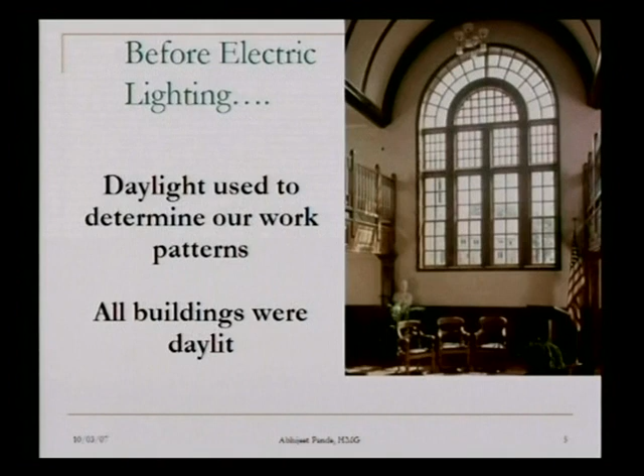So unfortunately, I'm not old enough to remember these in the US, but where I come from, India, that's still the case, thankfully so. But here, before we had a lot of electric lighting, or before it became sort of standard practice, we used to have daylighting everywhere, and that used to be our daily pattern. We sort of adjusted our activities around the daylight.

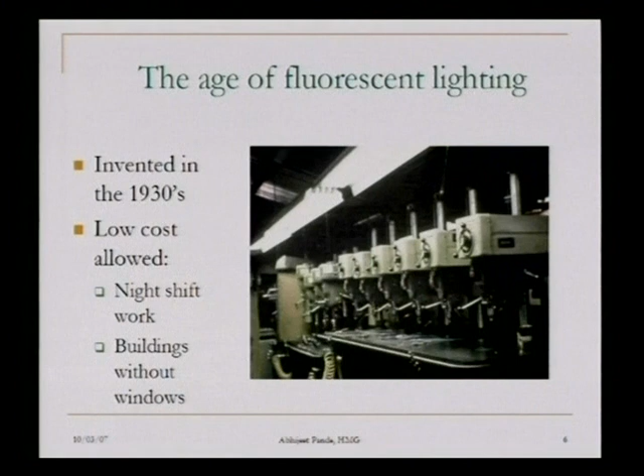Then, of course, we got the machines, and then we got all the wonderful things like air conditioning and low-cost construction techniques, and we got ourselves boxes. And when you have those boxes, you can go deeper. You can do without windows, those pesky things that leak and bring in sunlight and all that. And who wants those distractions anyways?

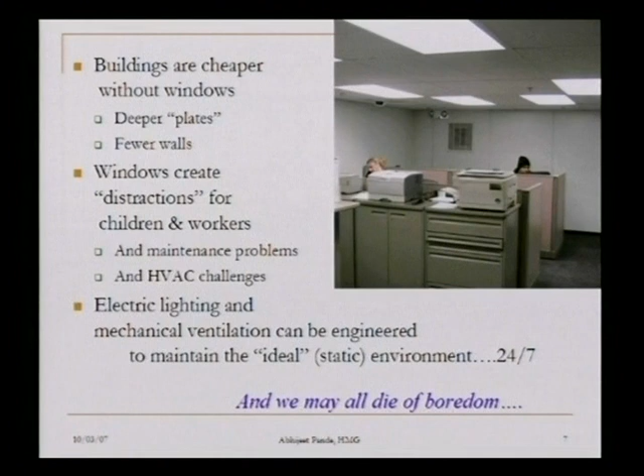A lot of schools actually went away from doing windows, not because they didn't like the sunlight, but because they thought, hey, if the student's going to look outside, he's going to get distracted, so let's erect walls around them. And we apparently do that with our workers too. So, thankfully we got the Dilbert cartoons out of that. And I'm not going to say anything about that, but that's the reality.

Of course, there's going to be some which are going to be above this range, but the point is, give people the control on their daylighting in their building or the light levels in their building, chances are that they're going to choose something lesser than what this 80% rule says.

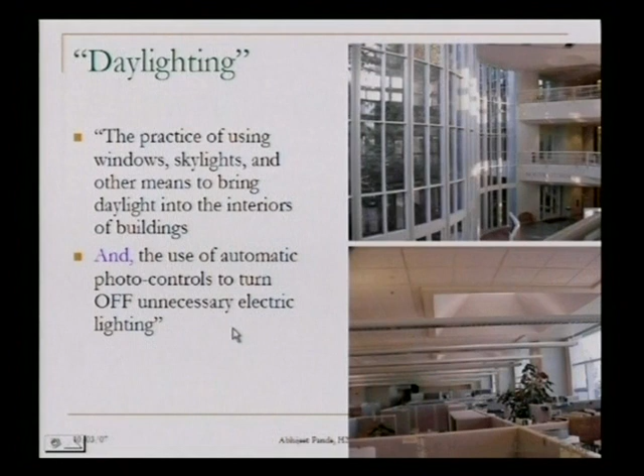So just a brief idea of what the energy savings potential is, and I'm sorry, these are California-specific numbers. The numbers here might vary, but the point is that there are significant savings possible through doing daylighting and by turning off the electric lighting. And we found, for example, that for a retail chain in California, the primary motivation was to save energy.

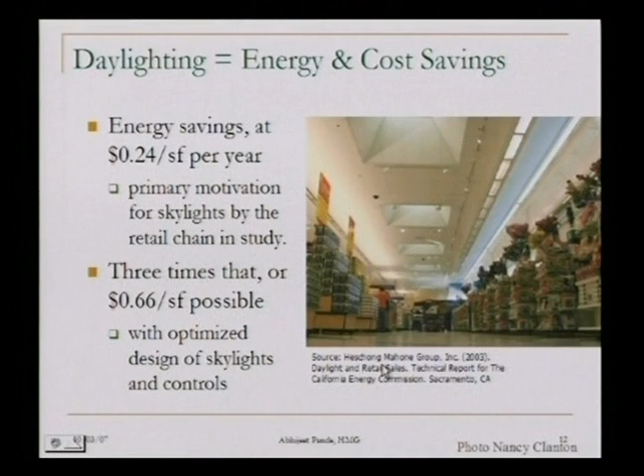It wasn't any sort of inherent green interest or trying to be sort of one-upmanship that seems to go on more often now. But the point also was that they could have gotten at least 3 times as much savings if they had done it right. So intentions are good. They want to do the right thing. You could do more. Here's another set of numbers. If you're looking at the lighting energy itself in buildings with proper daylighting and controls, you could save anywhere from 30 to 80% of your electric lighting.

As an example, I work in a building. I never use my electric lights at all. I have pretty good daylight. The only time I use it is when I work after 7, which, thanks to being married, I don't do that quite often anymore. But whenever I do, that's the only time I use the electric lights.

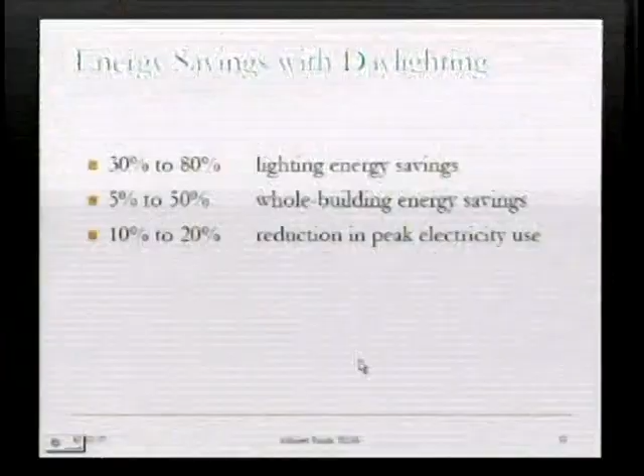How much does that convert to whole building energy savings? Depending on what weather you are in, 5 to 50%. And then this is kind of becoming a bigger issue now, is peak electricity use. One of our local utilities in Sacramento has to essentially double its capacity to provide electricity for that 50 hours of the summer when it's 110 degrees or 100 degrees outside and everybody is using their air conditioning.

Point is that daylighting can be an excellent strategy to get to those peak savings. If you can just turn off the lights or dim them 20%, you get your 10 to 20% energy savings. And the other point is that it works forever. You get it to work right once, it's going to work, and if it is ever broken, as if the power goes out or something goes wrong, you have made sure that your building has enough light for people to survive and work if need be.

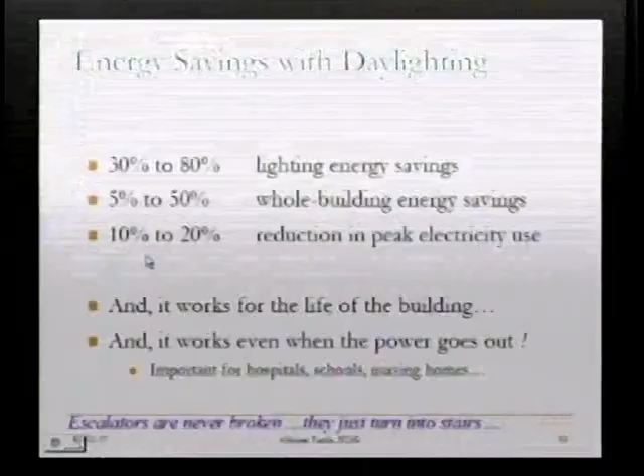I recently did a case study on a fire station and a police station, critical facility, where they used this principle to design their building, not because, again, they wanted to maximize their LEED points, but because their whole situation was if California ever has the next blackout, they want to make sure that they at least can work and get all their functions done with their backup generators supplying their basic functions, but they don't waste that on lighting and other things.

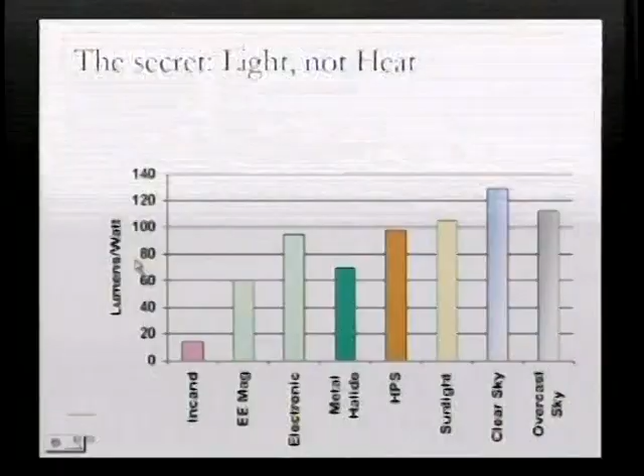So what's the secret? Some of these numbers might be changing now, but here's sort of an idea of the efficacy of different light sources that we work on, and these are expressed in terms of lumens per watt. So how much quantity of light would you get if you supply 1 watt of electricity to that particular device? Our good old light bulb is down there, right around 15. Some of our most efficient technologies are trying to get around 100 lumens per watt. But with daylight, you'll see that the potential is much higher. Especially with a clear sky, and if you avoid the direct glare from sunlight, you can have pretty incredible lumens per watt.

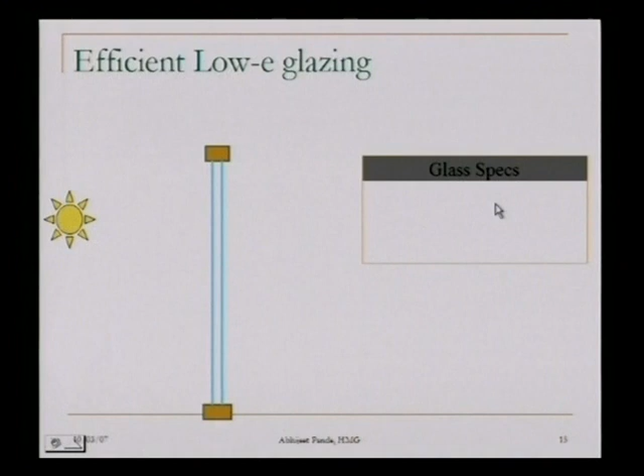How do you do that? This is one of the strategies, low-E glazing. You have 100 watts per square foot of heat coming in. You have a low solar heat gain coefficient. You get 40% of that inside. The same window can actually let in 70% of the illumination. So when you're talking about the luminous efficacy of this, you're talking about 175 lumens per watt. That's almost twice of any current electric lighting technologies.

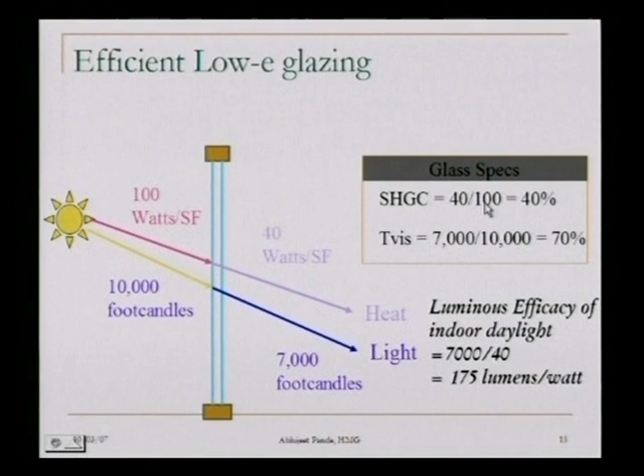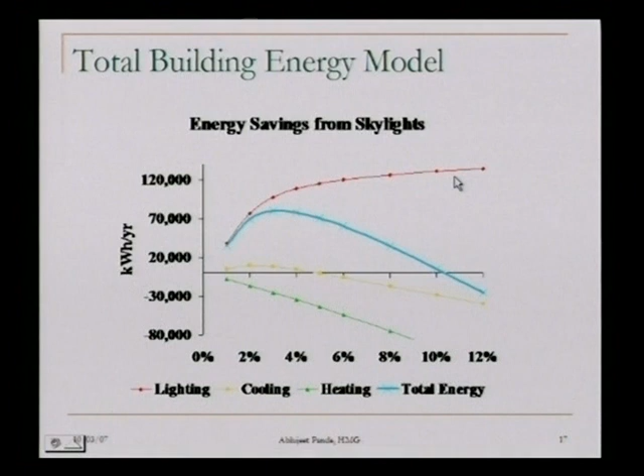Here's another way to look at it. Again, the same sort of skylight ratio. Now we're looking at the energy savings from skylights. As you increase the amount of skylights in the space, you're increasing the lighting savings, but again, they sort of taper off after a certain limit. You get some cooling energy savings because you're reducing the amount of heat the lighting system is putting into the space. You are increasing the heating. Here's what happened with the total energy use. So beyond a certain limit, your total energy use is going to start increasing, your savings start decreasing.

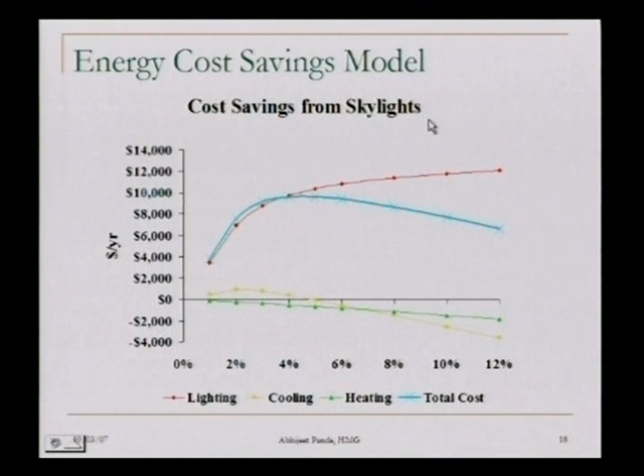Same thing in terms of the energy cost. So the point is, daylight is a great thing, and we all should do it, but too much of a good thing is a bad thing. And we're going to come back to that in the later parts of the presentation. But the point is, we need to be intelligent about how much we use that daylight.

And here's the problem. Can we get those promised savings? We have all our energy savings models and simulations that are going to tell us we can save 50% of our building energy, but can we get there if we don't do the design right, or if we don't get those photo controls to work? So that's the challenge. If people start taping over sensors or turning their blinds down and turning the lights on full output, what's the use of these daylighting apertures?

So I'm going to cover two studies, as I said. The first one we did in 2003 looked at top-lit buildings. These are buildings with skylights. The second study we did for side lighting. These are buildings with windows, in 2005.

In each of these, we compared the on-site energy savings against a sort of calibrated annual energy simulation model. And what we came up with is a realized savings ratio. I'm going to go into that later. But the point with that is we wanted to compare how much energy is being saved on site versus how much our latest and greatest models are saying we could save.

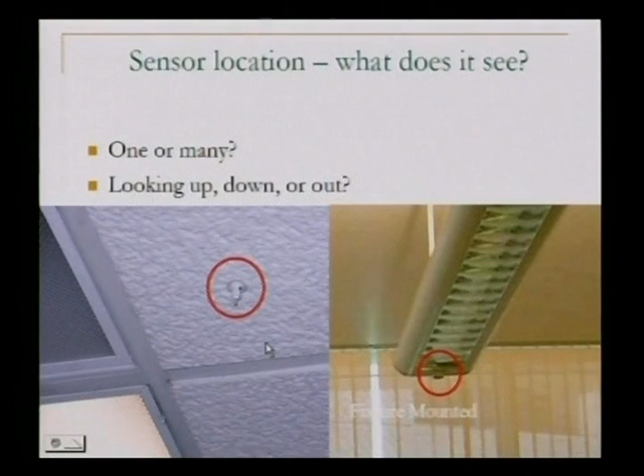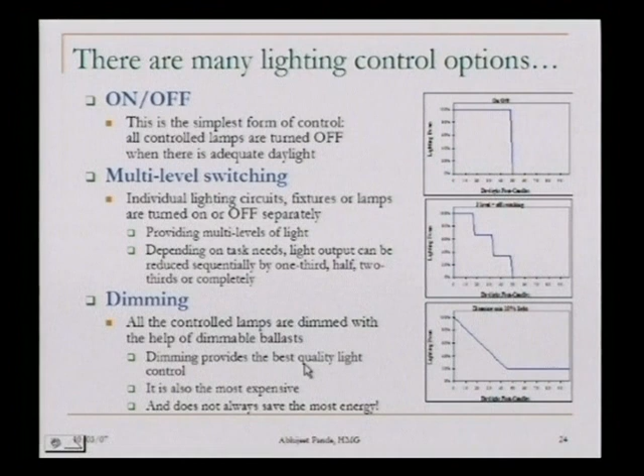You can have the sensor looking down in the space. You can mount it on the fixture. You can mount it outside. You can have a simple on-off control. You can have a multi-level switching control, so you get a little bit more fine-grained detail in your lighting control. Or you can do dimming, which is kind of the Cadillac of the daylighting control solutions. Your electric lighting levels will vary inversely proportional to the outdoor daylight.

The point I'm going to sort of belabor, and I'm going to come back to this, is whether you're doing switching or dimming, there's a thing called a dead band, not that the control system drops dead, but the idea is that for each of these, you need a set point when the lights are going to turn on. So if the daylight is, say, below 20 foot-candles out here, the lights come on. And then you need the lights to turn off when the daylight is above a certain limit, say 50 foot-candles.

The point is, if they are too close, you're going to get cycling and you're going to have lights come on and off or dim up and down. It's a nuisance to the occupants, and it's also going to eventually burn out your lighting system much faster. So the point is, we need to have that dead band, and we need to have a time delay so that it's not just cycling with the outdoor lighting.

Obviously, there's various types of photo control equipment, and I'm not going to go in a lot of detail, but you can control things at the individual fixture level. You can control it at the circuit level. You can control it at a whole facility level. And as you go more towards the fixture, the system gets more and more complicated because you have so many more components that you're trying to control independent of each other.

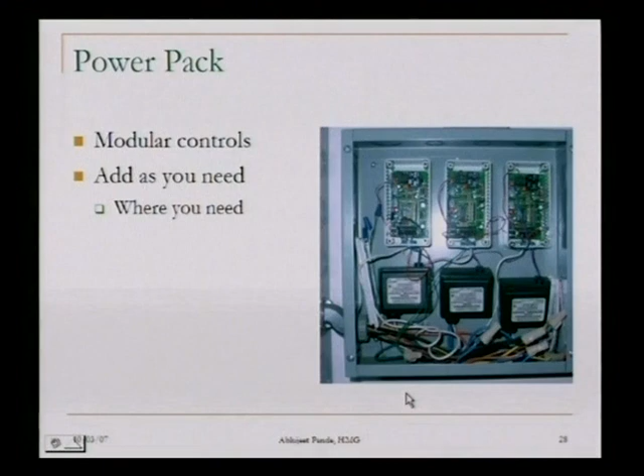You can do lighting controls alone, or you can do them as part of the EMS. Here's an example of an EMS system, or you could just go circuit by circuit or with a simple power pack. So what's the best control type, or what's going to give you the most savings? Well, the classic consulting answer is it depends.

What's your occupancy type? What are you going to control these lights with? How do you want to control them? What's the quality of light you need in the space? Is this museum quality lighting? Is this lighting that you require in a storage room? What's your energy savings target? Let's say you're very aggressive and you want to get that 50% savings target.

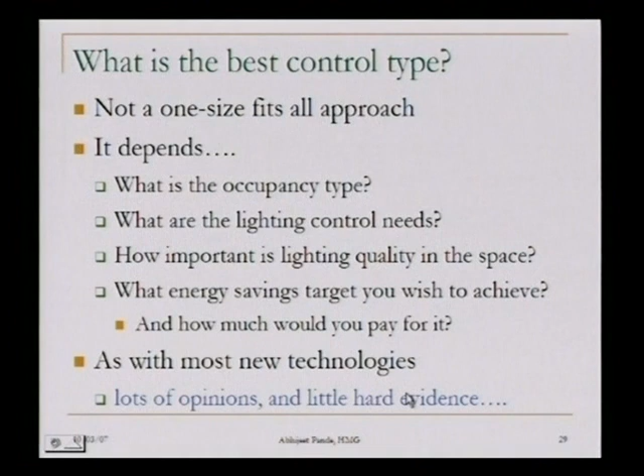So there's lots of opinions and little evidence, and I'm going to present what evidence we have. Let's start with the top lighting. There's lots of myths about skylighting and skylighting controls in general. They are hard to understand.

They are very hard to install. They fail very often. They're going to annoy the occupants, and they're going to never use them again. The skylights are going to cause too much heat gain, and yes, they're going to leak. So that's sort of all the issues we're going to look at.

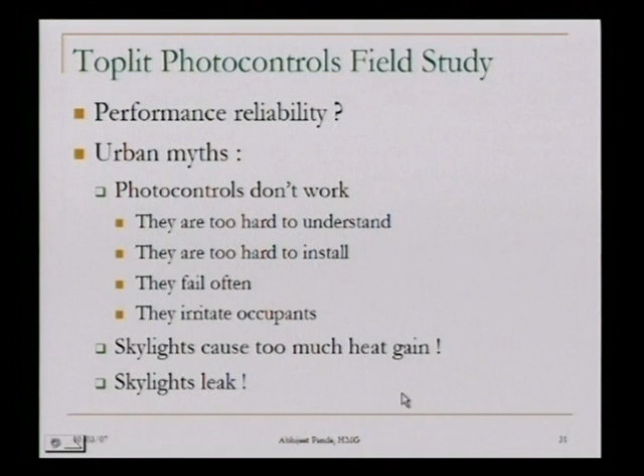So what we did, this is back in 2003, and this is California specific, but we looked at about 150 buildings that had skylighting and had daylighting controls, and we gave them a call, talked with them about what their systems were, see if the photo control systems were still installed on site, and completed interviews with

them and said, can we come to your sites and take a look at this and verify how much they are saving? Of those, about 46 said, yeah, you can come ahead and do your survey. So we went there, we did some power metering, did the analysis, and we're going to look at that next.

So to look at what types of spaces we did, now remember this is top lighting skylights, so you'll see a lot of buildings which are sort of the large big box buildings. There's manufacturing warehouses, there's retail buildings, a few offices, and a few classrooms.

A lot of these, because again they happen to be part of that big box retail chain or manufacturing, the lighting is part of the whole building EMS control system. It's not a standalone, although we do have a lot of buildings that are controlled individually.

This last bullet here is kind of interesting, right? We called 160 people. We confirmed with them that they had photo controls. Yeah, we have skylights, we have controls. Come on site, you can verify savings. 3 sites, there weren't any photo controls.

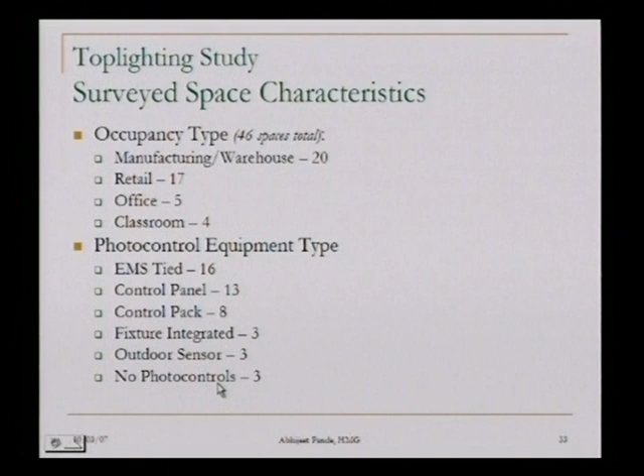One of them had occupancy controls. The other site, they had light switches. So the point is, a lot of people don't know about this. They think they do; sometimes they don't. Here's what people told us their systems were doing. Overall, pretty good picture, right?

With 46 sites visited, about 36 of them are working or working with very minor problems. Only 2 sites, they told us the photo controls were not working. 4 of the sites, they said, yeah, they're working, but we're not really happy. We want more savings, so we're just turning off our lights.

One site where they said, no, we don't like it. We keep our lights on all the time. As I said, 3 sites, well, they didn't have any photo controls.

Wherever they had this sort of dissatisfaction or, gosh, this could work better, we asked them, what was it with? We asked them about the building type. We talked about what kind of a control system it was, whether it was fluorescent lighting that was a problem or HIDs, whether it was particular occupancies, whether it was just a bad idea to do this in offices

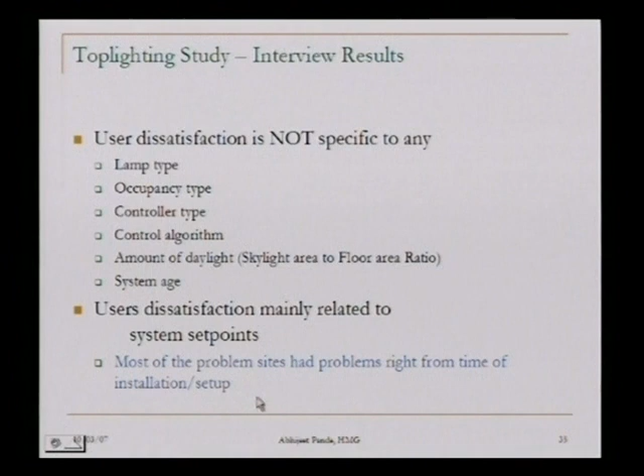or classrooms. Was it the control algorithms, whether it was switching or dimming or multi-level switching, was that an issue that they were unhappy with? Most of the answers said, no, it's not specific to any of these. Most of them dealt with sort of the details.

They either come on too soon, they go off too soon, they fluctuate too much, or they're just doing too many things or too few things. And most of these problems seem to be happening from the time the systems were installed. So it wasn't something that they were happy with and then started having problems with.

So we went on site and we did a subset of these sites. Now we went on 46 sites, as I said. We installed lighting loggers on all of these, measured the energy use, and we had to drop a few sites either because our loggers failed or they didn't have photo controls, or sometimes these loggers are pretty attractive targets for shoplifters, so some of them walked away.

But anyways, we had 32 sites that we could look at, and we categorized them independent of what the people said into fully automated versus those that were working, but people were manually assisting them.

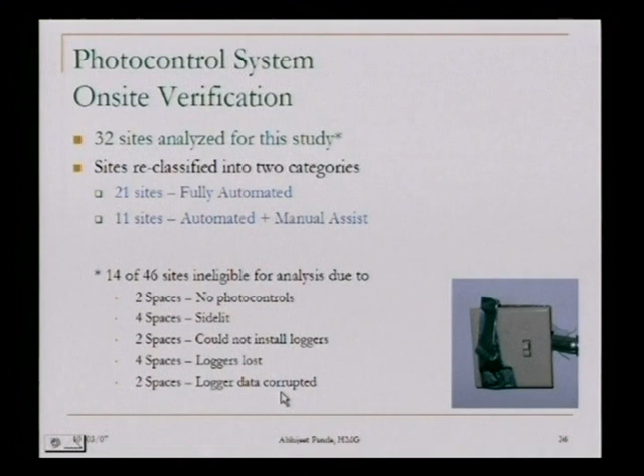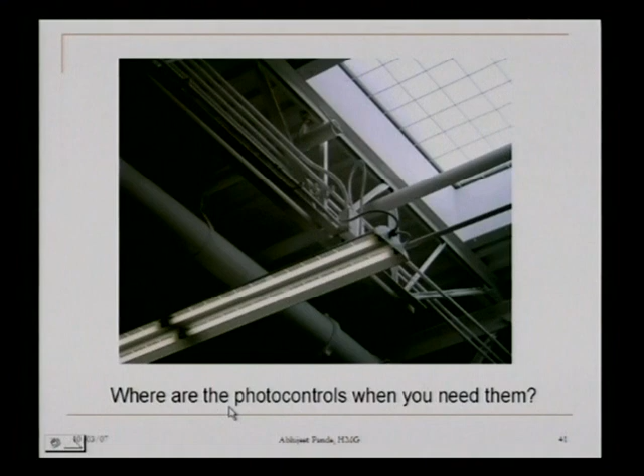And we got pretty close to the ideal realized savings. So that's the good part. But there's still some of those out there in the market. So here's the story. If you don't get the systems to work right, if they're not happy with it, it's never going to be fixed unless you go in and do some commissioning in those systems.

As you can see, most of the sites with manual assist and about a third of the sites, even with fully automated systems, they said that we were never happy with these systems. They never did what we thought they should be doing. And as I said, the problems range from either the lights are turning off too soon or too late, or doing too much or too little frequently.

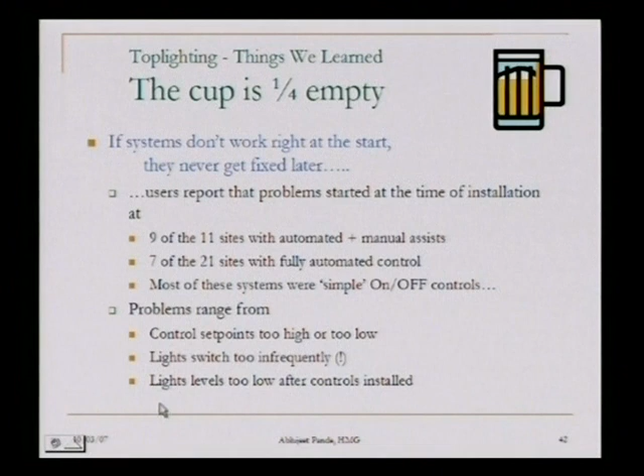Most of the people, even those where the systems are working very well and saving as much as ideal, don't know how to make these systems work, or how these systems work, or how to change them. A third, even those buildings that were working well, didn't even know where the sensors were. I had to spend some quality time crawling in attics and over roofs and various places trying to find a sensor which looks that size, right? So imagine a 50,000 square foot warehouse, 20-foot high ceiling, trying to look for this all over the place.

Point is, if the owners and the building staff don't know, there's no chance if it fails they're going to know how to fix it. And again, if they don't turn the lights off, you're going to increase the building energy use. So we came up with a photo controls guidelines document aimed at manufacturers that first time. And we said, how can you make your products better and inform these people of how they should be working? So we gave them some guidance on how to make these products, the packaging, the information provided with the products, and the instructions that they provide to their installers.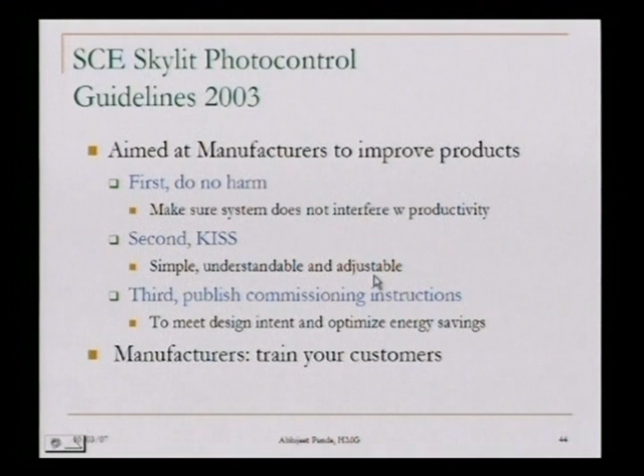And the basic principle is keep it simple, keep it understandable, and make it adjustable. If it's not adjustable, if it's not simple, or if they can't understand it, it may work now, but the next time something fails, it's not going to work for the rest of its life. So then we presented this in 2003, and the first question I used to get was, well, this is great, but what about side lighting? Because that's really the problem, because top lighting, you talk about warehouses and retail stores, but most of our buildings are like this. We have offices, and so what's going on there?

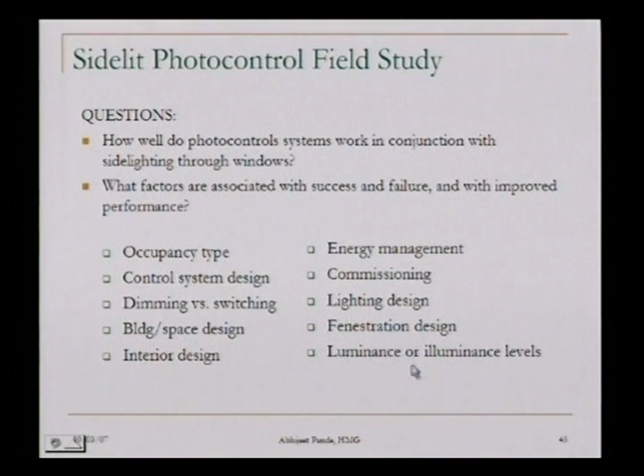Our hypothesis was that we're not going to find such stellar results for side lighting as we found for top lighting. One, it's a more difficult process to get lighting into your space through side lighting, especially if you have a deep floor plate. So we did a follow-up study, and this one we did in Oregon, Washington, and California, so it was a little bit more widespread, so we could get more climates and more building types. And we looked at which of these factors would start affecting the photo controls' performance and see if it works well or less well than with top lighting.

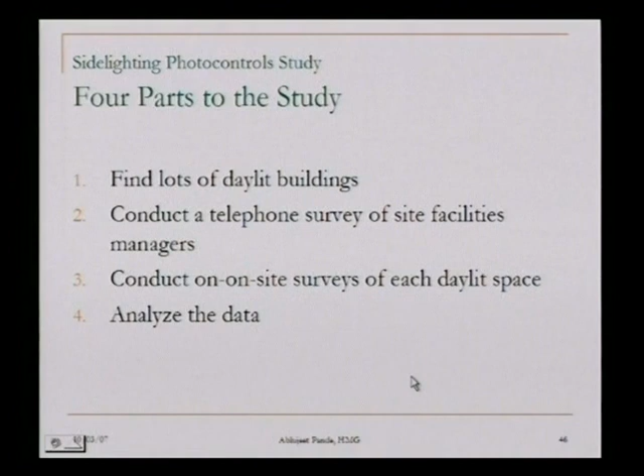So again, similar idea, find lots of daylit buildings, call them up and say, hey, do you have photo controls? In most cases, explain to them what photo controls are and what they should be doing, and saying, do you have those? Do you have a device that kind of looks like this and is hanging out from your ceiling or something? And then asking their permission and going on site, doing our survey, collecting data, and then analyzing that data to compare to what they were saying. So this time, again, we called about 163 buildings. We asked them if they had photo controls. If they had them, we asked them if they were working, and most of them were saying, oh yeah, we put them in and they work great.

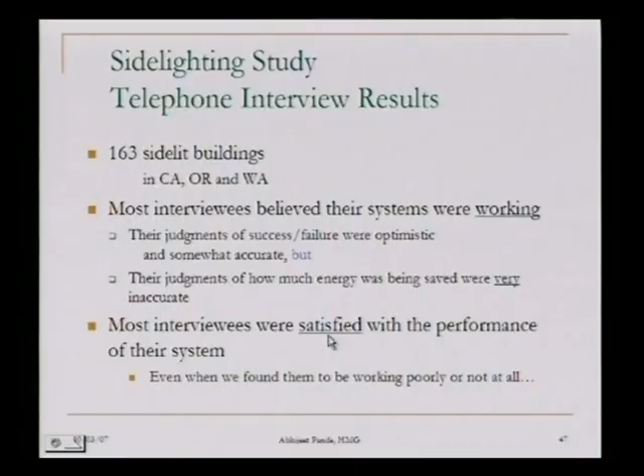Later on, we found out that they were kind of optimistic in how much their systems were working. But in general, if they said it was working, it was indeed working. Or if they said, no, it never worked, it never was working. The second point that was important, though, is although they knew if the system was working or not, their estimate of how much energy they were saving was very inaccurate. So you ask somebody on the phone, hey, you installed a photo control system, how much do you think it's saving you? Oh, 50% or 5% or 2%. And the results may or may not have anything to do with this. The point here is most of them, even those that said my system is not working, were very satisfied with the performance. Go figure, if they have disabled it, I don't know why they are satisfied, but they were satisfied.

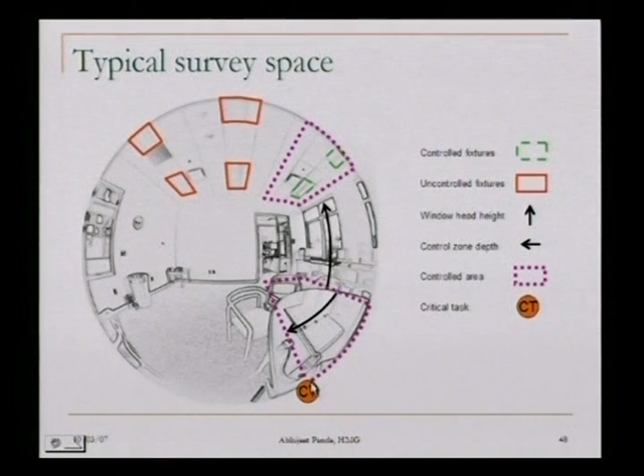So all of these, which are controlled by the daylight sensor, are in the control zone. So in this case, this first row of light fixtures was controlled by the daylighting sensor. So that's our control zone. In each case, the furthest spot in that control zone away from the window was our critical task location. Now, if that happened to be the water cooler, we tried not to do the water cooler, tried to do a workspace. So the idea is that the person who is working there is most likely going to be irritated if the lights are turned off and he or she doesn't have enough daylight from the windows.

So we installed loggers looking at daylight coming in from windows. We installed current loggers on electric lights, both the controlled fixtures as well as the uncontrolled. Uncontrolled as in those not controlled by photo controls. They might have other controls like manual switches or occupancy controls. So we could compare those two. We looked at, as I said, the critical task illuminance, and we looked at how much the photosensor was seeing, so we can see if the photosensor location was part of the issue.

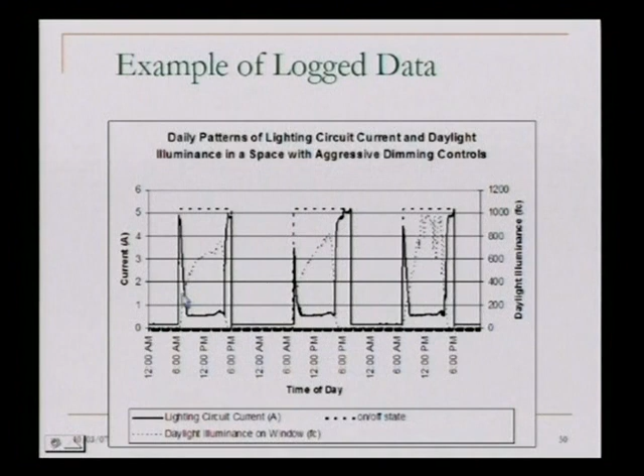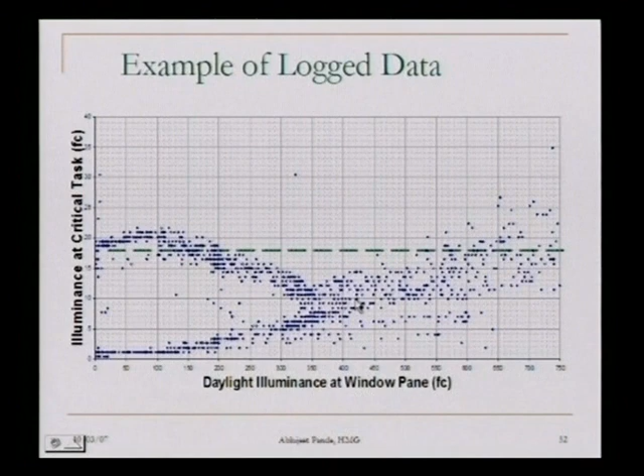If this was not working, you would see a parallel line going up here, always providing that additional 20, 25 foot candles. But since this is a good dimming system, it's trying to maintain that illuminance level, and actually this is an overly aggressive system. As you can see, it's trying to maintain this level of illumination and actually doing a little bit more. People are just happy with that. They are trying to be more aggressive. So the point is, they're saving really well.

So we went on site, as I said, we asked these people about these systems and said, what do you mean by working well? Oh yeah, they put those systems in and it works. So we asked them specifically, did you ever commission these things? Did somebody do a full commissioning of these? And it was kind of a fuzzy concept. Most of the people, if they ever had records, they couldn't show us. In a lot of cases, commissioning to them meant that the architect or the lighting designer had given them a spec sheet from the manufacturer that said, here's what your control system looks like, with a picture of the controller on it.

But the point was that even though those systems that I showed here were working very well, none of them could actually show us how they were supposed to be working. Because ideally, we would have compared what that was doing versus what the design intent was. Never was documented.

We asked them about complaints. We didn't want all success stories. We were actually looking for modes of failure. So we asked them what their complaints were, and they were sort of across the board. They went from being too hard to calibrate, which was the most common complaint, and then sort of all over the place.

We asked them how they were working, and then we diagnosed them, as with the top lighting study, of what the systems were doing on site. And we identified of the 64 spaces that we visited that had no savings, that about half of those they had consciously disabled. They had either adjusted the set points so that the system never works, as in the lights never turn off. They had just overridden the system so that the lighting control panel or whatever device it was bypassed. They had taped over the sensors.

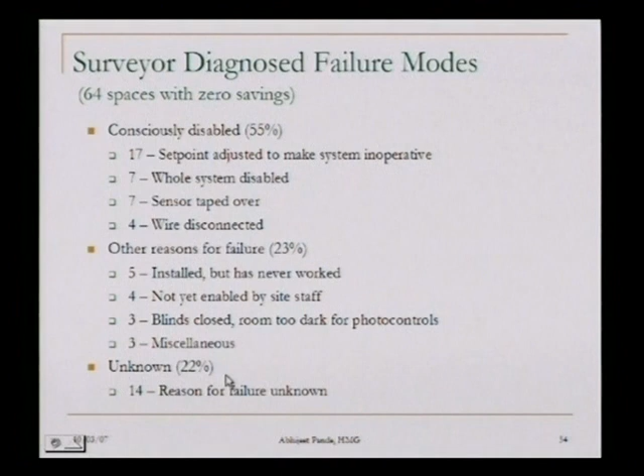They have cut wires. In other cases, about 23% of those, they don't know. Things were installed, but they never worked. They don't know why, either because it was installed and never worked, or it was never installed or not commissioned. In a few spaces, they commissioned this thing, it was working, then they decided that there was too much sunlight, closed the blinds, turned the lights on. And about 22%, they just couldn't know.

So what were characteristics of some of these spaces that failed? We found out that, in terms of daylighting quality, spaces that had only light coming in from one side tended to fail more often than spaces that had daylighting coming from both sides. If there were windows oriented anywhere but north, and this is especially true if they don't have any shading on them, if there was direct sunlight penetration into the workspaces, or if they have partitions. So, if I have a 6-foot partition right here, there's just no way my daylighting control system is going to work.

We also looked at if there were any issues with the people in the space in terms of ownership. We found that often when there were multiple people deciding on what the light levels should be or how those should operate, things tend to be overridden more often. Then it becomes a question of maximum complaint mode. If the buildings were larger, which implies that the systems were more complex, they tended to fail more. Or if the site staff didn't know how the systems were supposed to work, they tend to fail more.

In terms of control options, we found that surprisingly switching controls tended to fail more often than dimming. You would think that dimming systems are harder to commission, harder to install, harder to understand, that they would fail more often, but we found switching failed more often. But that's only half of the story. I'm going to go into that next.

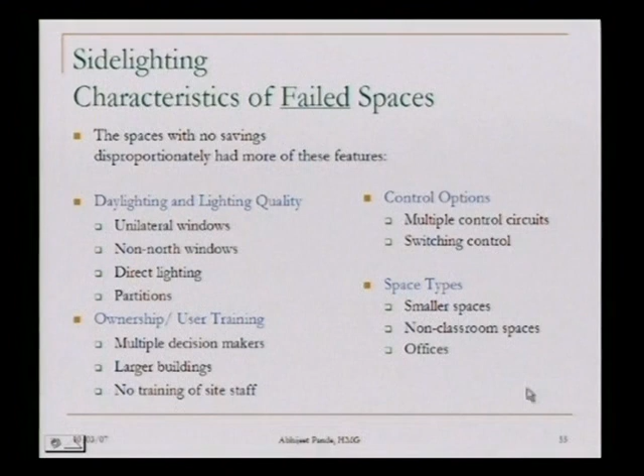We also found, I talked about large buildings, right? But surprisingly, within those buildings, whether large or small, if the space that you're trying to control with daylighting was smaller, they tended to fail more often. Classrooms worked really well, but everything else tended to work a little less. Offices particularly didn't work as well. And it could be a combination of larger buildings, multiple decision makers, or that you have individual small offices, all contributing to that.

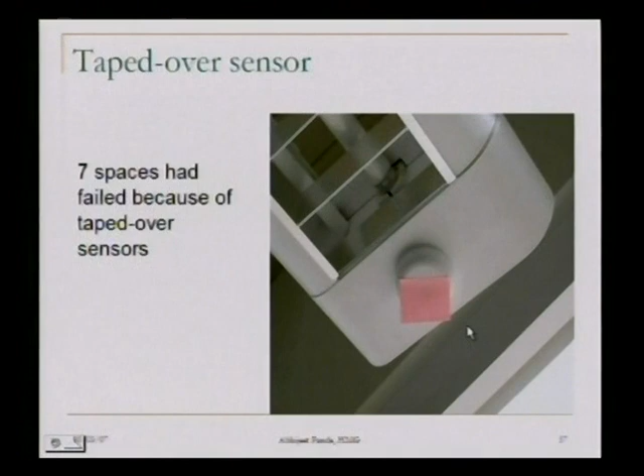As I was mentioning, if you're doing daylighting and if you do this, there's very little potential for doing any daylighting controls. As I mentioned, this is the high-tech duct tape now. You can get it in 50, 60, 75, and 95% transmittance. So 3M is doing a good job on those.

Which, if you look at sort of whole building level, we estimate in California that we can save 4.7 kilowatt hours per square foot by doing the whole building. So by doing HVAC and ventilation and various other things, we can get as high as 4.7. Of those, you can get up to 1.1 with these controls.

But here's the kicker. We found that half the spaces we visited had working photo controls. Of the half that had working photo controls, only about half of those saved at least half of what the predicted energy savings would be. So contrast that with the top lighting study, 98% savings compared to the ideal, whereas here you're looking at about 25% savings compared to the ideal. So there's a lot of potential to improve there. There is a lot of potential to get energy savings, but there's a lot of challenges to get to that level.

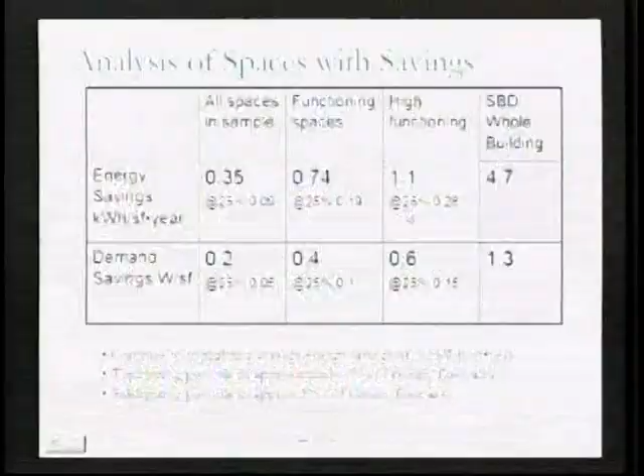So I talked about things that didn't work. Some of the things that did work though. Older systems tended to work more. Maybe just that they worked and therefore they remained, and newer systems or other systems that didn't work got taken out. Photosensors closer to the windows, the system tended to work better, sort of obvious because you have more direct correlation between daylight and what the control system is sensing.

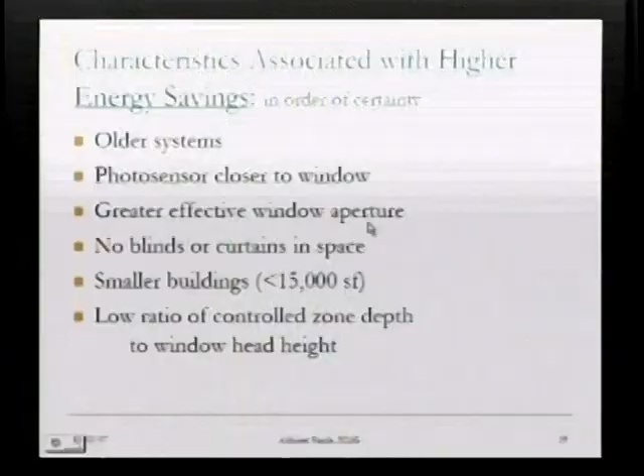Greater effective window aperture, and I'm going to go into that in the next slide. But the idea is that the better the daylight aperture is, the effective opening into your space that daylight has to come into your building, the better the system is going to work. If those pesky blinds and curtains weren't there in the buildings, things worked great. Smaller buildings tended to work better, either because people were more actively involved or there was one person running the building.

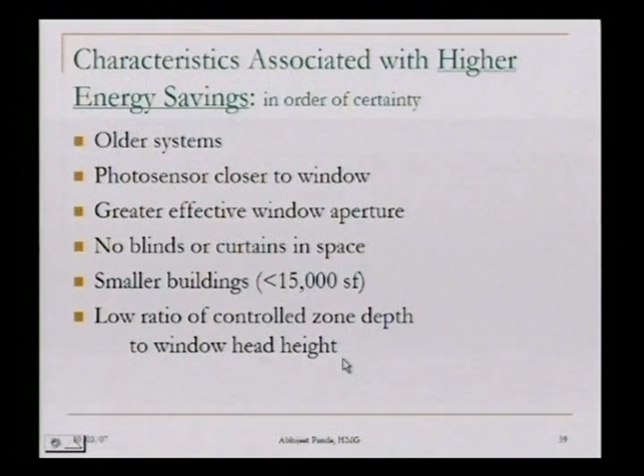Here's the other part, kind of goes hand in hand with the window aperture, is the control zone depth. I talked about the critical task. So let's say the critical task was out here. That's the control depth. And the ratio of this depth to the height of that window matters a lot. The often used adage for daylighting is 15 foot from windows, right? Doesn't matter if your windows are 25 foot tall or 5 foot tall. We found that actually is not the right metric to use. The better metric to use is this control zone depth to the window head height ratio, because daylighting is geometric. It doesn't do magic curves through your space.

Abhijeet, is there some guidance later about what those zones, geometries would be? Yeah, absolutely. Again, as I mentioned previously, switching systems tended to fail more often, but when they worked, they saved a lot of energy. And both these together are sort of contradictory, but they make sense. If they are working, if you're turning off all the lights, 100% savings, right? More savings. But if the lights are going on and off too many times, somebody here is going to get annoyed and say, make that stop, I want those lights on, so they're going to disable the system. So switching is more aggressive and would give you more savings, but dimming systems tended to last longer if they got them to work well.

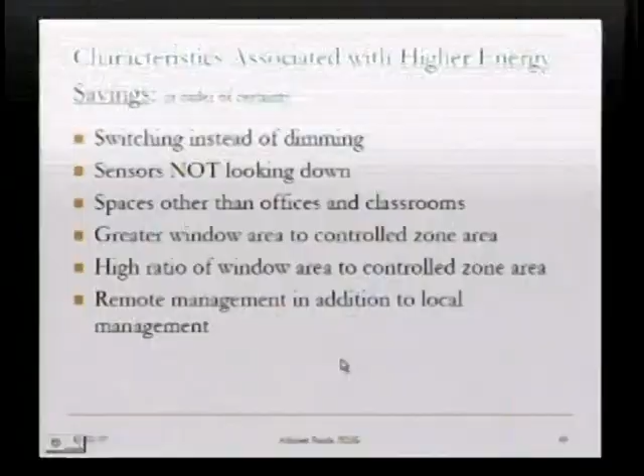We also found, specifically in office type buildings, if the sensors were not looking down into the space, they tended to work better. Now, that again goes contrary to what everybody is used to doing, or what everybody is assumed to be doing, which is put the photo control in the middle of the space, make it look down so it sees both the electric light and daylight. We found that when the photo sensors were actually closer to the windows, looking directly out, they tended to work better.

As I said, spaces other than offices and classrooms had higher energy savings. Now, classrooms worked more often, but they saved less. So again, the point I'm trying to make both with switching and with the classrooms is that you can achieve one of the two. You can have sustained savings, or you can have very high savings in a few sites. You can't be overly aggressive on everything.

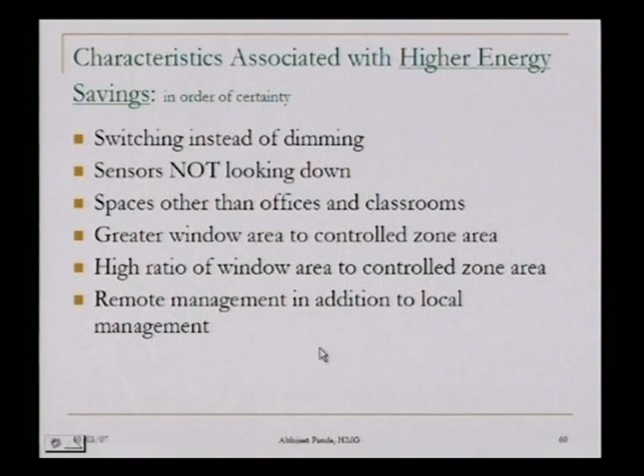If there was more window area for that given control zone, you had higher savings. If you had any remote management of your photo control system, so if the manufacturer is involved, or if there's a third-party vendor that is responsible for maintaining the system and looking over and seeing if it is actually working, chances are it's going to work and save more energy.

That's sort of a summary of all the things we talked about. We talked about higher effective window aperture: the higher the windows in the space, the more systems will save and the more it would work. The shallower the control zone, the more it's going to work. Photo sensors closer to the windows and oriented towards the windows, it's going to work better.

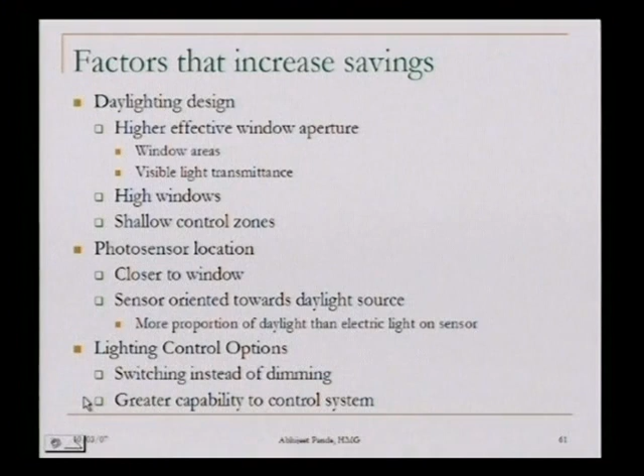And switching will save more than dimming, but dimming is more sustained. And the more capabilities you build into your control system to change it, the more it's going to keep working. So coming back to the window, effective window aperture.

Quick question, in your study of the side lighting, did you have any that were combo, top and side, or did you exclude those? We excluded those. Both in the top lighting study and the side lighting study, we had a couple of buildings which were combos. We eliminated those just because we didn't want the results to be sort of affected.

So with the daylight aperture, as I was saying, the effective window aperture is a combination of the area of the window, the amount of light that comes in, which is the visible transmittance of the glass, and also importantly, the visible transmittance of the blinds. Very often we don't take the blinds into consideration when we are looking at daylight levels in the space. It's important to do that.

So the product of those three gives you the total amount of daylight coming into the space. That divided by the controlled lighting area is your effective aperture. The point is you want to maximize this, and you can do it essentially 4 different ways: larger windows, more visible transmittance of the windows, more transmissive blinds, or lower controlled area. You can do any of those 4 to get your higher effective window aperture.

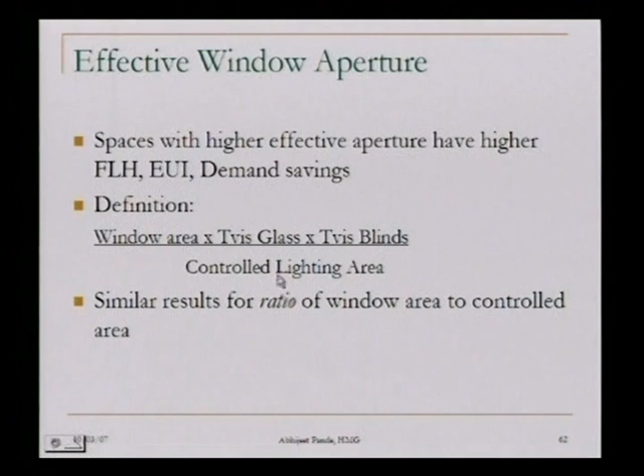Similar results, these are again tied into, as I said, the ratio of the window area to the controlled area. We already covered this, dimming versus switching. So here's coming back to your question, Kevin. What we did was we looked at the energy savings for these buildings where things were working really well or not working at all.

And the key graph here is the control zone depth to head height ratio. So again, what's the distance of this critical task from that window as compared to the height of that window? And what we found was that we had ratios as high as close to 5. So imagine a 10-foot high window. They were trying to control lights 50 foot deep. Doesn't take a lot of thinking to think that that's not going to work.

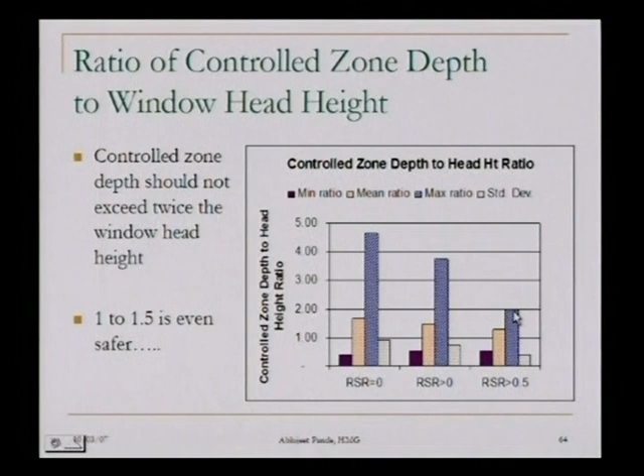Things that did work really well were those where the maximum ratio didn't exceed 2. So if it's a 10-foot high window, you can go up to 20 feet. Now, why that's important, compared to the old adage of 15 feet, is that with this newer ratio, you actually increase your potential for daylighting. It used to be that you would concentrate only on the 15 feet close to the window.

But if you have a library with a window 20 foot high, why not go beyond the first 15 feet? And what it shows is that as long as you maintain that ratio, you can get the energy savings that you expect. You don't have to just limit yourself to the first 15 feet.

As I said, the age of the controls surprised us because the older systems tended to work better than the newer ones. It sort of indicates that the controls technology itself had not much to do with the operation of the control system. If they work, they continue to work, or if something is new and it's not going to work, it's not going to work.

So there was no report of equipment sort of failing by itself. It's like, well, I don't know what happened, we installed it, but it suddenly stopped working March of 2006. It's either it never worked or it's working.

Some of the examples, as I said, libraries tended to have pretty high energy savings. Going back to my effective aperture and the window head height, taller windows, you can get more daylight further back into the space, you can get more savings. They are owner operated, so there's one person who decides what the lighting should do, easier to get that lighting control.

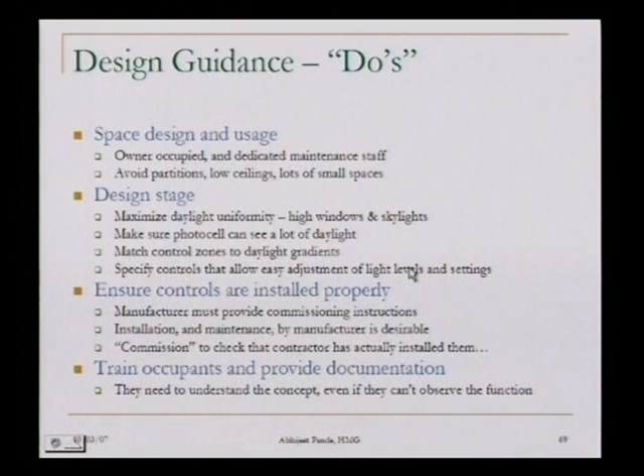And last but most important, train the occupants and provide them with some documentation of how this thing is supposed to work. Daylighting controls are still new. Most people don't know them. And if somebody doesn't know what this thing is supposed to do, chances are they're going to use it incorrectly, or the first chance they get, they're going to install something else that they are happy with, which is a light switch.

Don't do high partitions, as I said. Also, don't do very small control zones. Don't try to do the light fixtures just by the window. One, it's just costly to do that. You're not going to get much savings out of it.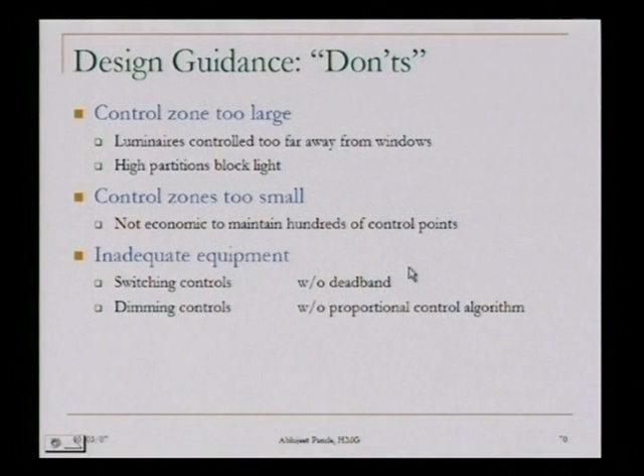And then I came back to that issue of the deadband. Make sure that your equipment that you're installing gives you all the necessary settings like the deadband and the time delay, so that your lighting system is not flickering on and off or dimming up and down if a cloud happens to go by. Make sure that the sensor is oriented right and it's looking at the daylight source, that it's not looking at a dark space or it's too far away from the window.

And the last two would sort of seem obvious, but most people seem to have a hard time getting those right, is make sure those wires are connected. We went to a couple of sites where they just didn't know why the systems weren't working. So I had to crawl into the ceiling and realize, well, what's this wire hanging loose? Oh, the sensors never connected to the controller, I see. Or they were never commissioned, or they were controlling the wrong circuit. Doesn't help if you connect that wire but connect it to the wrong place.

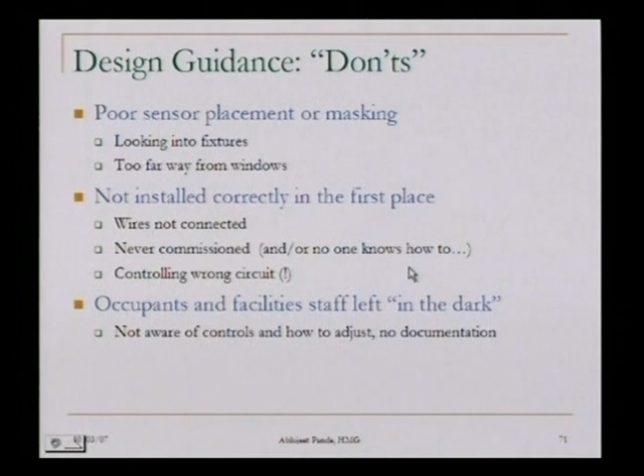And the last, as I said, don't leave them in the dark. Tell them how it should work and how they should change it if they're not happy with it. That's the key, is to give them the ability to change it. And lastly, as I said, commissioning. This is a great opportunity for any would-be commissioning agents to understand how these systems are supposed to work. There's a lot of business out there to make these systems work.

Where you can get copies of these studies, you can go to the California Utilities Codes and Standards group. It's www.calcodesgroup.com, and you can search for photo control under their projects list. We're also coming up with a revised photo controls guidelines aimed at designers this time. The previous one was for manufacturers. This time it's going to be aimed at designers and their contractors. Hopefully by end of this year, early next year, we should have this up on the Energy Design Resources website.